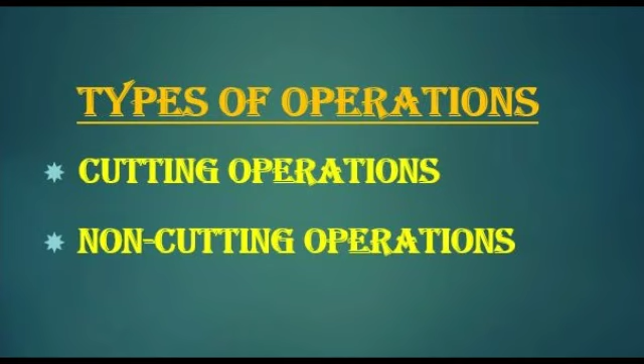Today we are going to learn the types of press tool operations. Basically, press tool operations are of two types. First is the cutting operation and second one is the non-cutting operation. Cutting operation is also called the shearing operation and non-cutting operation is called the forming operation.

Now we are going to see the types of cutting operations. In press tool operations, punch and die are the two members. There are various types of cutting operations used in press tools like piercing, blanking, notching, lancing, parting off, cut off, cropping, perforating, nibbling, louvering, trimming, shaving. All these are cutting operations. That means shearing happens during the cutting of the metal strip.

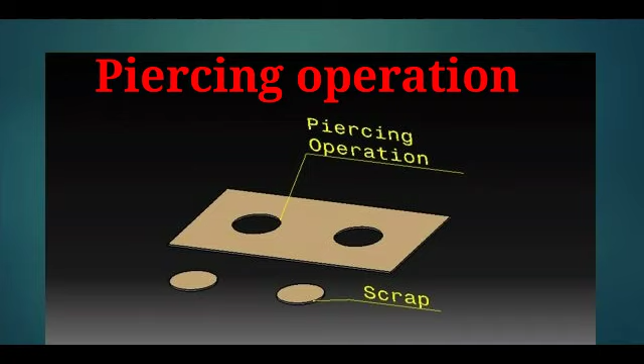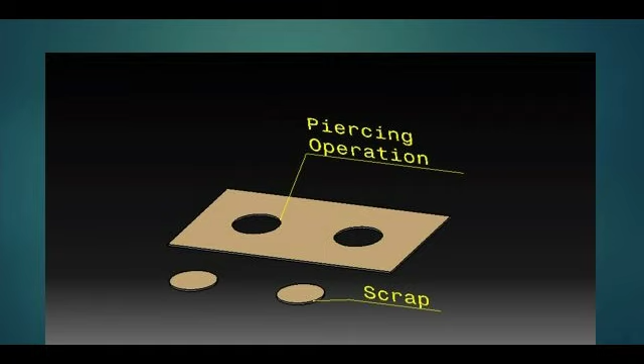First of all, we are going to see what is piercing operation. You can see in the image, punching in sheet metal is cutting a desired profile in sheet metal. The primary strip from which the metal is cut is usable and the internal cut piece is scrap. You can see in the image.

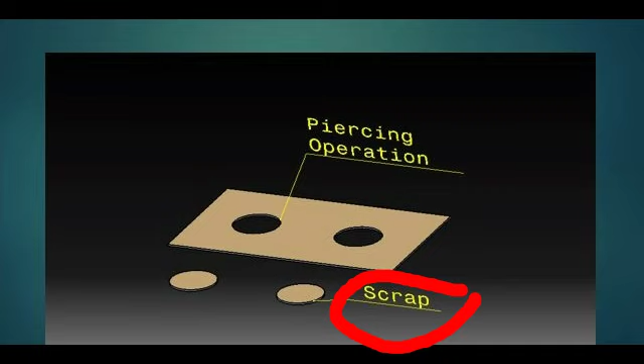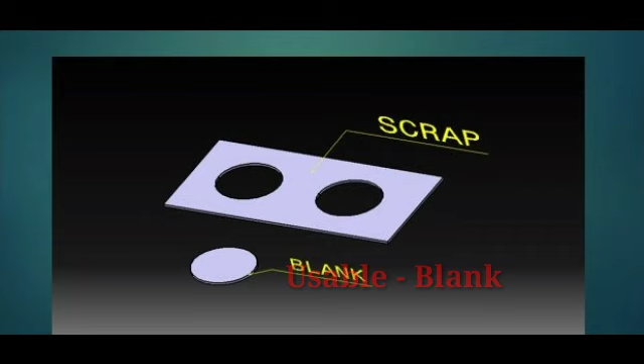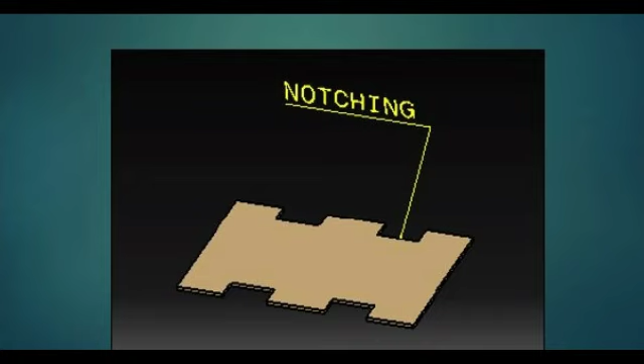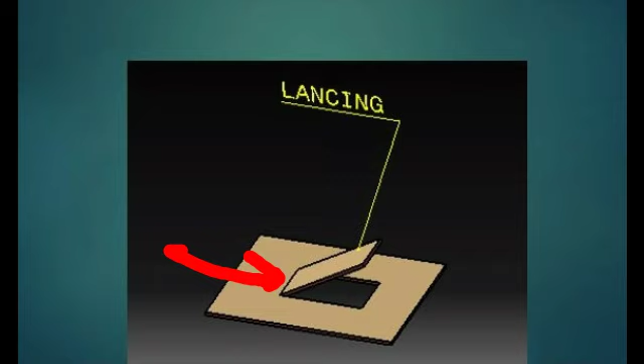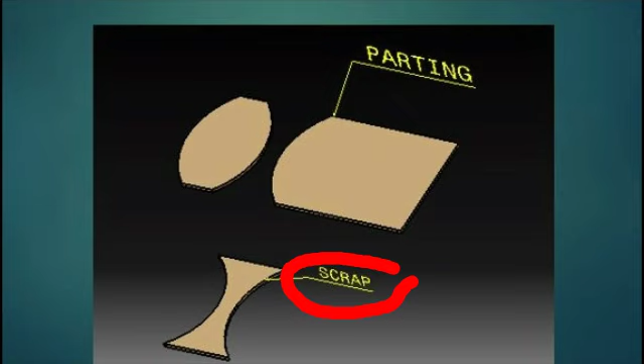Next is the lancing operation. In lancing operation, three sides are cut and one side is bent. Look at the image on the screen. In case of parting off operation, the material is cut between the two components to separate it from the parent metal. Look at the image, the scrap falls down and the sheet is divided into two parts.

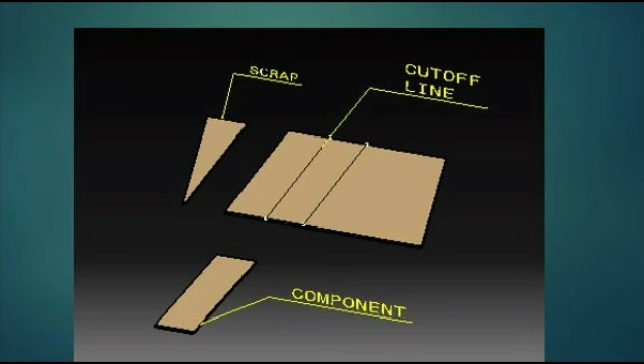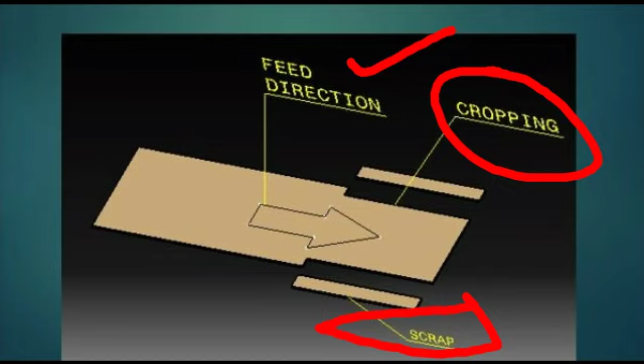In case of cut-off operation, the cutting action must be along a line. You can see the cut-off line, one portion is the scrap and the component is in the downward direction. That is the cut-off operation. That means the cutting is along a line. Next is cropping, a cutting operation to control the strip movement. Look here, that is the cropping, these are the scrap, and the feeding direction is from left to right.

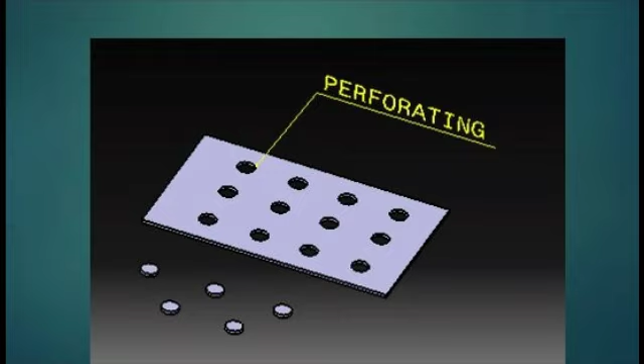Perforating. When a maximum number of holes are pierced in a single stroke of the press machine, it is called perforating. Look at the image, a number of holes are cut in one stroke. Now we are going to see nibbling. In nibbling, we cut out the sheet to size with the help of punching. You can see a number of punches used to cut the sheet into two parts. That operation is called nibbling.

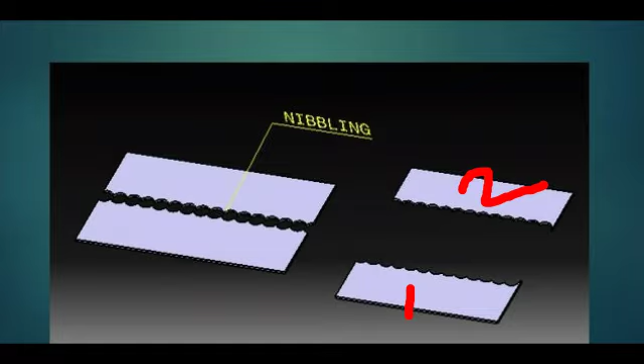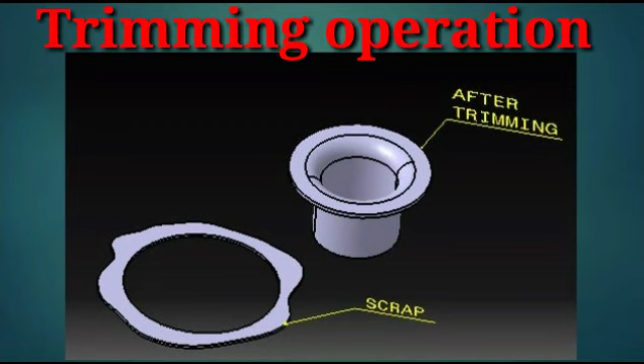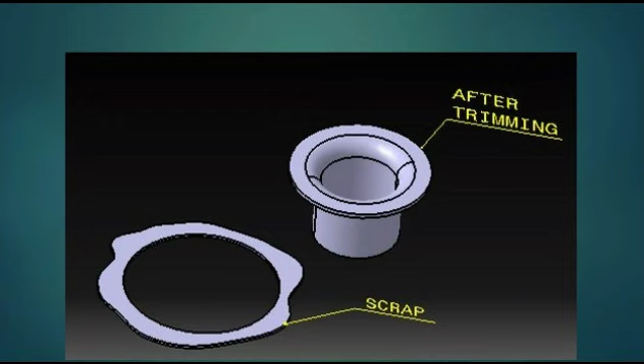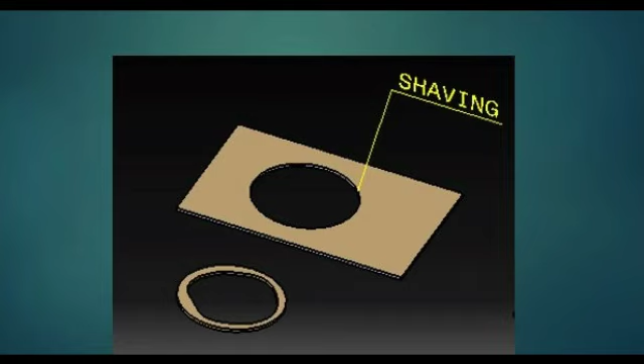Shaving operation. In shaving operation, it provides a finish cut to the blanks and pierced holes. That is shaving. Now we are going to see the non-cutting operations. Non-cutting operations include bending, drawing, embossing, coining, hemming, seaming, curling and bulging. All these operations come under the non-cutting operations, which we are going to see step by step.

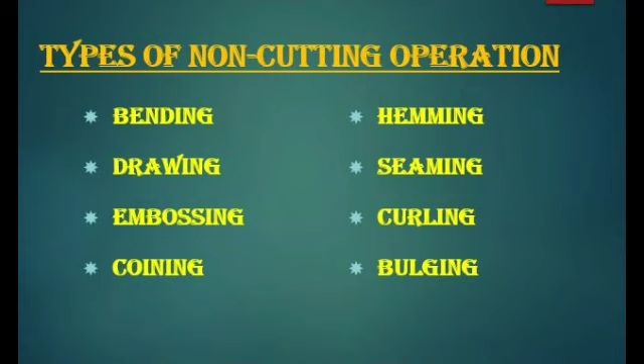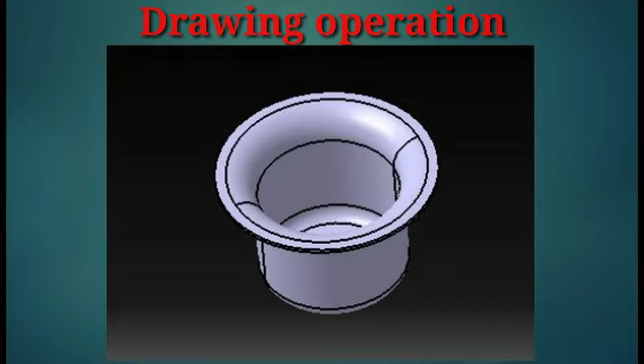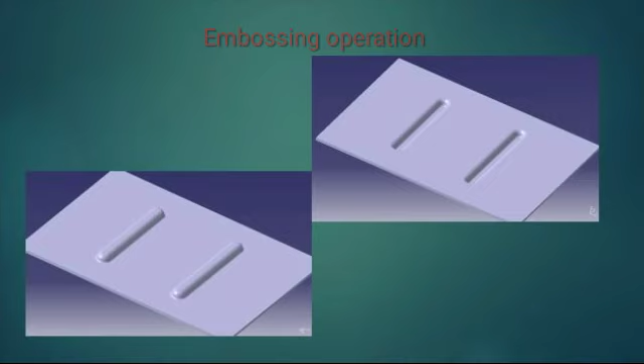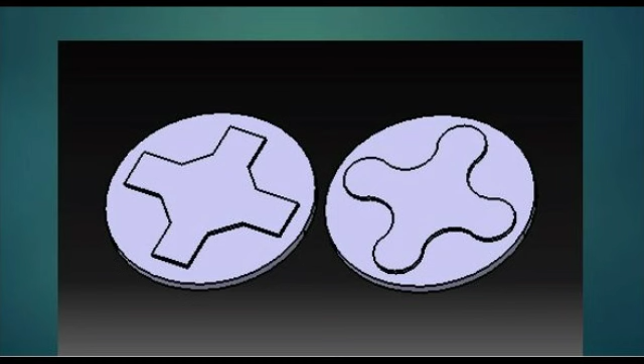Now we are going to see embossing. Embossing is a shallow forming operation at equal thickness. The thickness stays uniform. You can look at the image of the embossing operation. Coining. It is the operation of making impressions and depressions on sheet metal.

Bulging. It expands the cups along a narrow band and at the same time reduces the height. You can look at the image on the screen. The drawn cup has the higher height, but after the bulging its height is reduced and it expands the cup diameter. That operation is called the bulging operation.

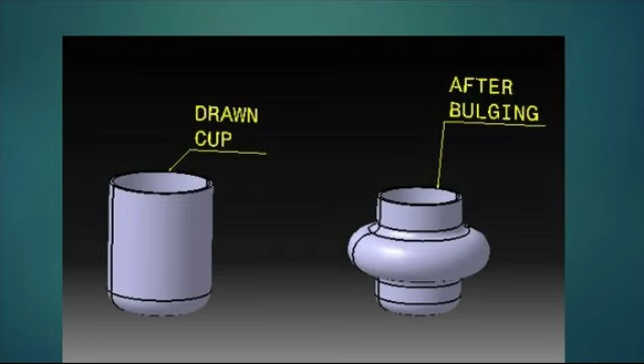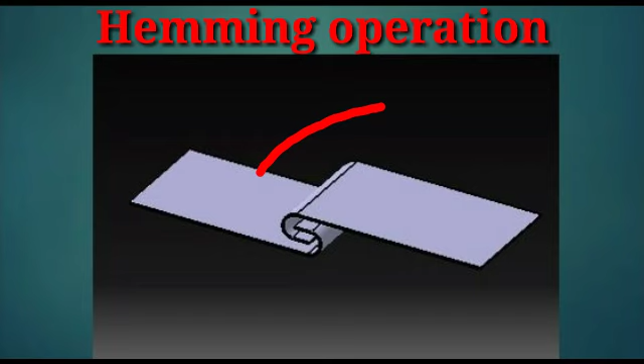Hemming. The hemming operation is used to join two sheets. Look at the image: just a C-shaped structure, and after that it is pressed. That joining of the two sheets is called hemming. Now we are going to see the seaming operation. It is the operation of pushing the material inside or outside all around the periphery. That operation is called seaming.

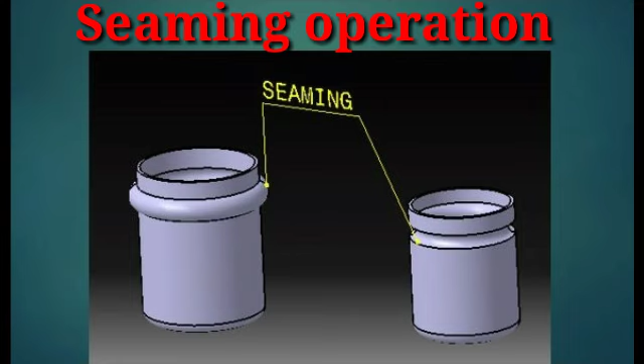Curling operation. It is the operation of turning the edges inside, called the curling operation, to provide strength at the top and for safety purposes. Sharp edges or sharp corners are curled.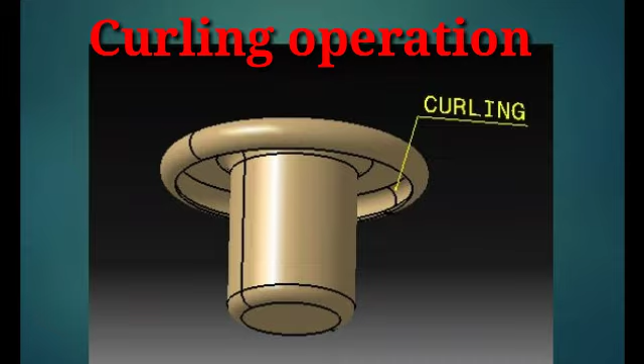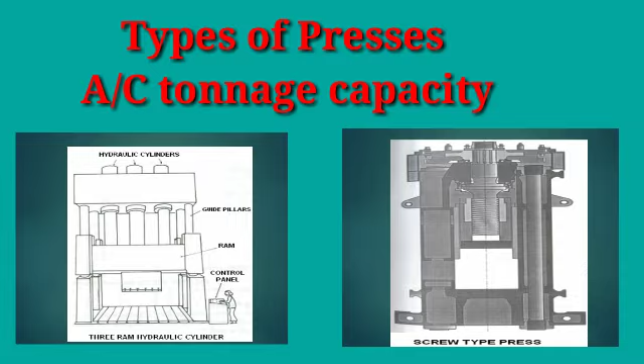Now we are going to see the types of presses. During press tool operations, various types of presses are used, from 2 tons to 200 tons for applying the pressure, and their classifications depend upon various factors like shape, table position, stroke, number of slides, the type of drive, and which type of actuation it has, like mechanical or hydraulic, and also the type of operations. So these are the various types of presses we are going to see step by step.

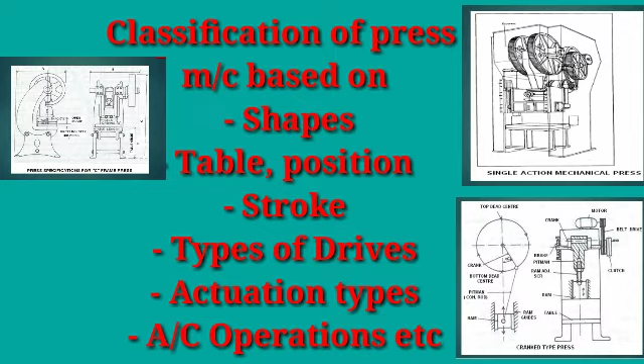According to the shape, press machines are classified into C shape and H shape. You can look at the image. In the C shape, the C frame structure, you can observe that it is a C frame, and the open height, press bolster thickness, and the table width and depth are mentioned. Table length, table depth, back opening, and table height. All these are the specifications of the C frame.

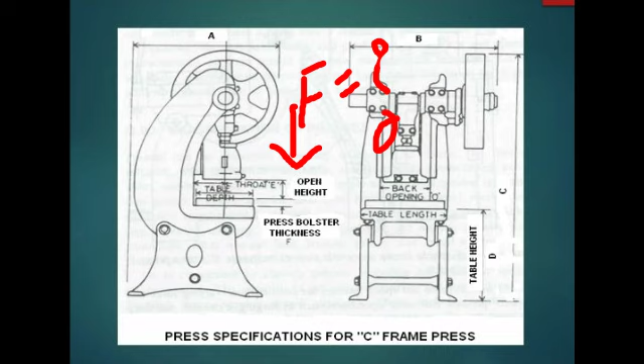So during selection of a press machine, we have to understand how much force we require to do the cutting, shearing, or bending operation, which operations we are going to do, and we also have to understand its specifications. According to the shape, the second type is the H type. The H frame looks like an H shape, so it is called the H frame.

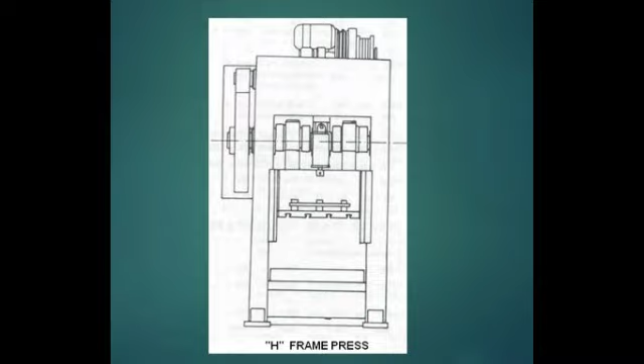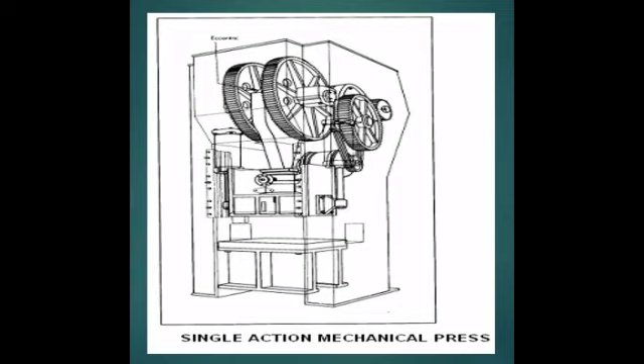The next classification is according to the table position. First is the inclinable table and second is the non-inclinable table. According to the stroke, the press machine is classified into two types, that is fixed stroke and variable stroke. Press machines are also classified according to the number of slides: single action, double action, and triple action.

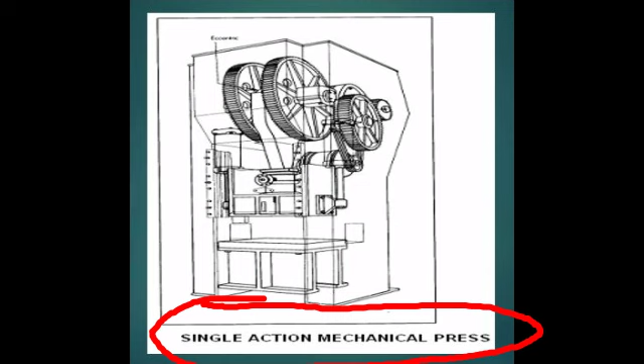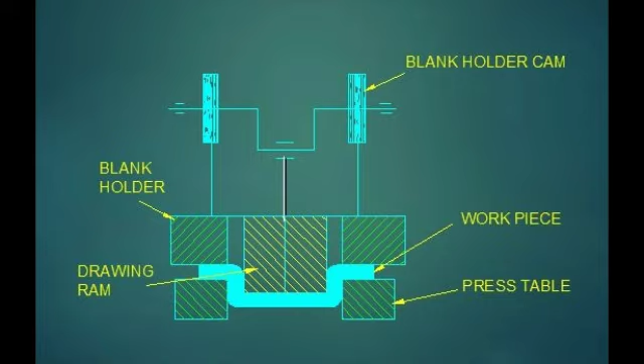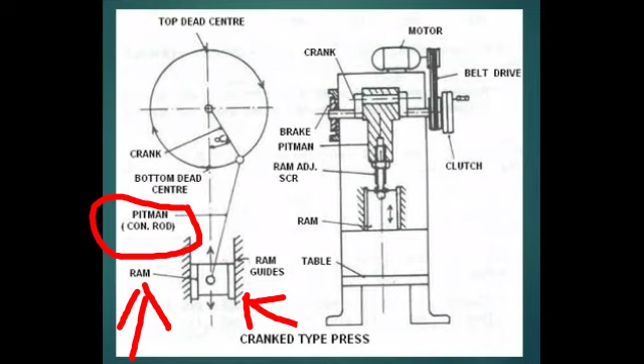According to the type of drive, the press machine is classified into the crank type. Look at the image on the screen. The crank is connected with the pitman, or you can say the connecting rod. So the ram moves in the upward and downward direction, and it applies pressure, load, or force on the press tool. According to the type of drive, the second is the knuckle type. In the knuckle type, the press ram is attached to the adjustable wedges, and the crank moves in the upward and downward direction.